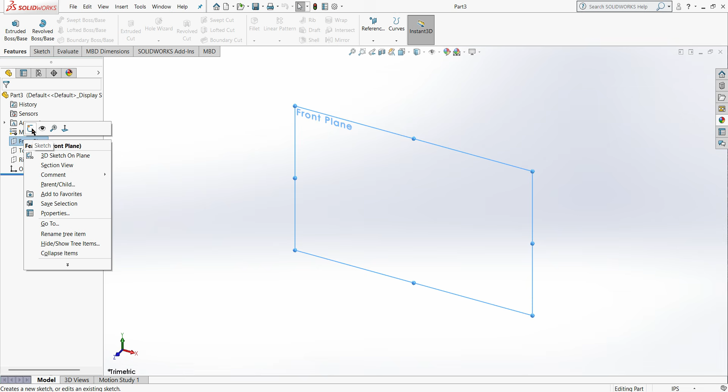Start with the front plane. Right click on the front plane, say sketch. Now take the center line and draw this 2D sketch. Before that, set the unit to mm. Double click on this line, again take the center line and draw another line.

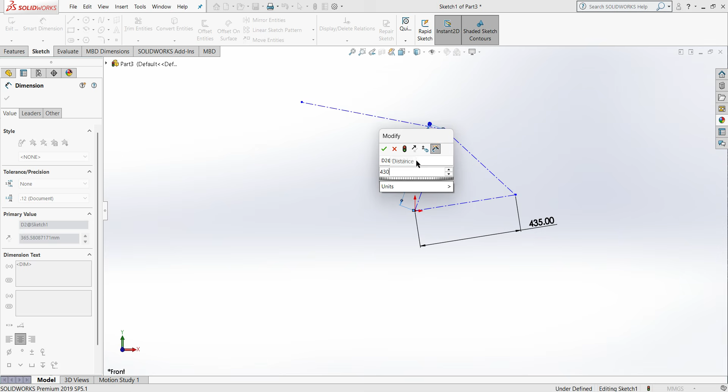Now give the dimensions to this 2D sketch. It's 435 mm. This is 430 mm. This tube length is 580 mm.

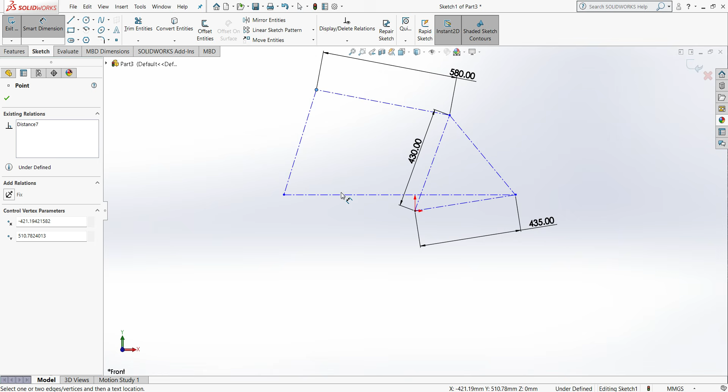Now take the center line, draw it from this side to this side. This line should be horizontal, say yes. Give the height from this to this, it's around 560.

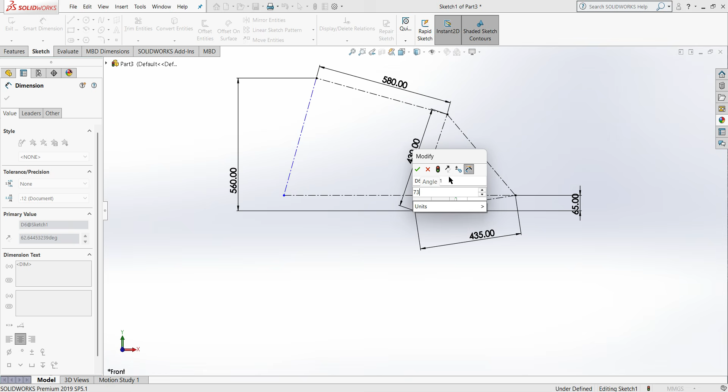Now select this point and this point and give 60 and 65 mm. Now give the angle. This angle is 73 and this angle is 75.

So our 2D sketch is completed. Now say exit. Now we have to add a plane on this point, say yes. So we add this plane to make the front fork.

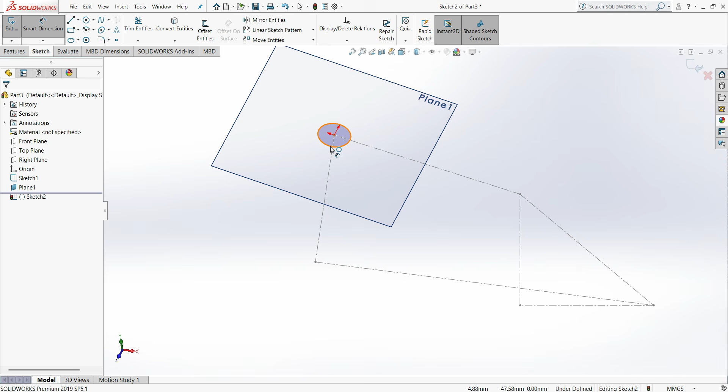Go to the circle tool, draw one circle here. Again take the circle and draw a circle here. Give the dimension to this circle, it's 52.50 mm. Go to features, say extrude base boss, and this is 130 mm.

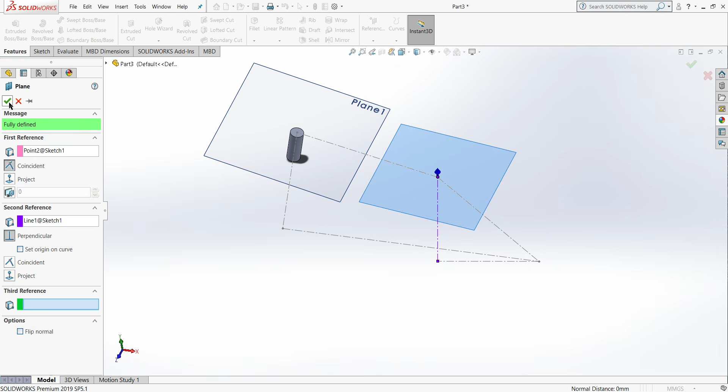Say yes. Now we are going to add another plane on this seat tube. Go to the sketch, again select the circle, draw one circle here, assign the dimensions. This is 35 mm. Go to extrude base boss, it's 50 mm.

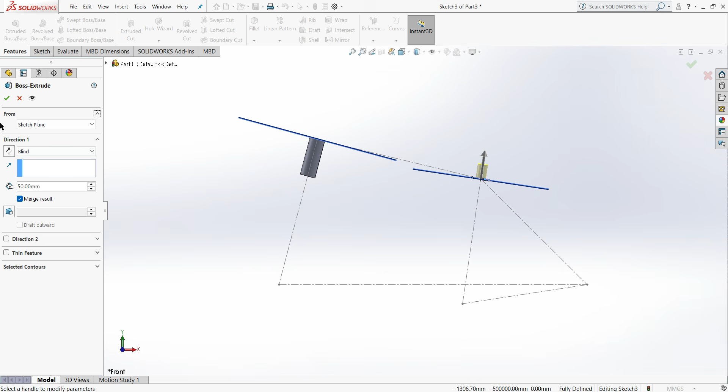So on the upper side it's 50 mm, the length of this tube. Now again add a plane, select these two lines. The plane is added. Now again draw one circle here.

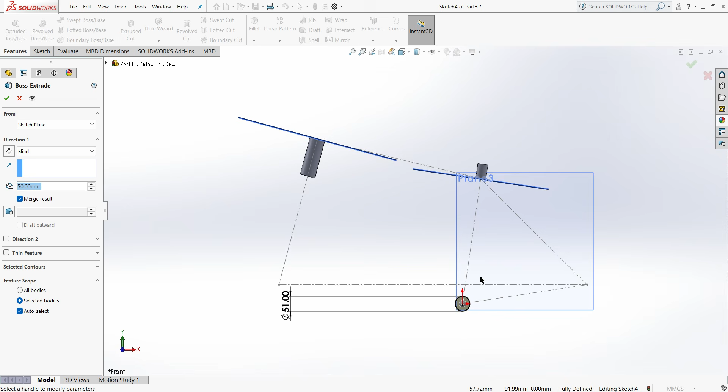Now give the dimension to the circle, it's 51 mm. Go to feature, extrude base boss, you can see. This extrude base boss is from one side, but we want both left and right direction. So select mid plane, and this length is 80 mm. Click yes. So here we can see the front fork, seat tube, and bottom bracket are ready.

Now we are going to make the seat tube. First hide the planes. Now we are going to make the seat tube. For that, select the bottom side face of this tube and say sketch, then draw a center point.

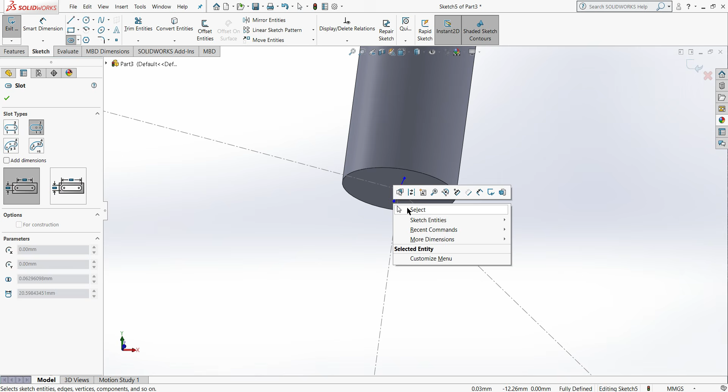Select again, draw this center point straight slot. But before that, say normal view, then it's easy to make it.

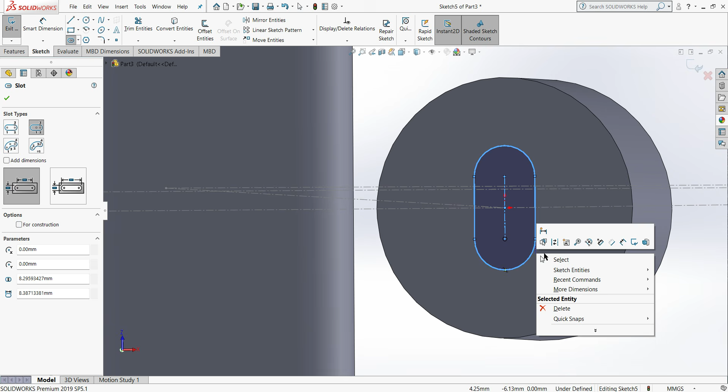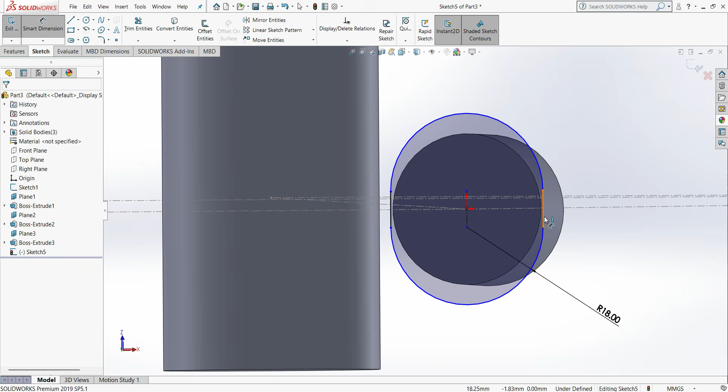Select this. Now give the dimensions. These are 20. It will be reduced up to 18, now it's looking better. Now give this 10.

Say yes. So edit this top plane, and normal view, again add one center point straight slot.

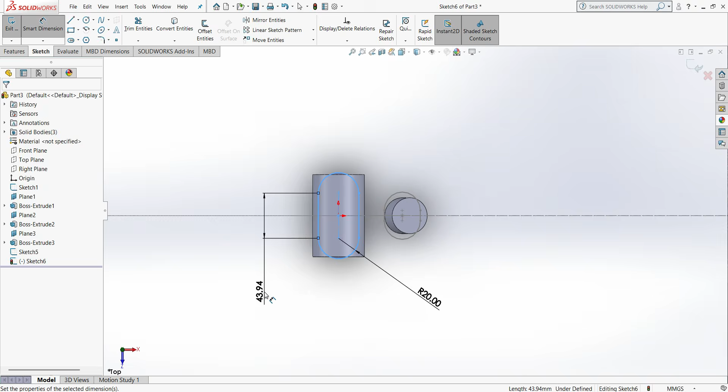Give the dimensions, it's 20, and this is 10. But okay, so this is 15. We can also increase it slightly, it's 18 now. So these both sketches are drawn.

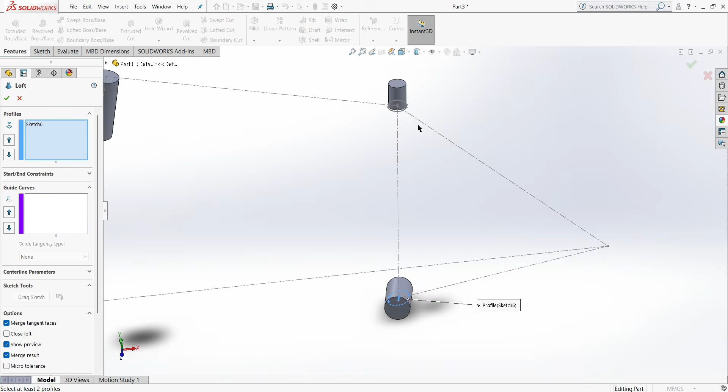Now what we have to do, go to features, say lofted base boss. Select this sketch and this sketch. This partial preview you can see here, say yes, and our seat tube is ready.

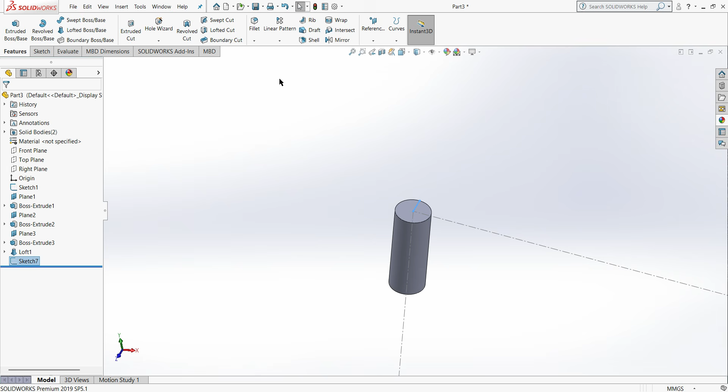Now we are going to draw the top tube. For that, go to the sketch, click on this face and say edit. Draw one line here. Say exit. Go to feature, add one reference plane.

Okay, so before that, what we have to do? Add one plane here. Select these two, say yes. Okay, increase this plane size.

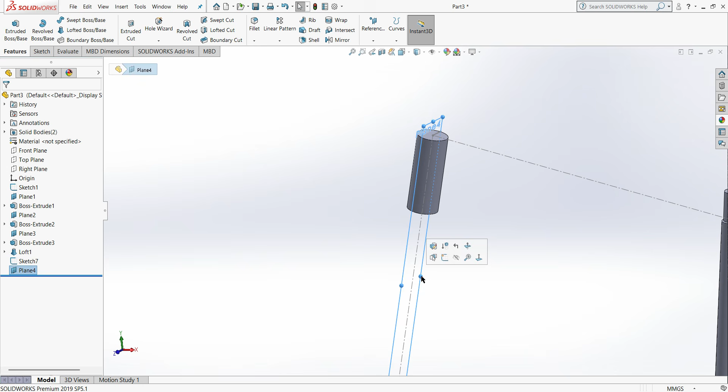Say normal. Go to sketch and again take this center point straight slot and draw one center point. Select this and say horizontal. Say yes. Give the dimensions. It's 22.50. Say yes, and this is 10.

Now it looks better. So this same sketch we have to draw here. For that, say exit. Now again select this face of this tube. Draw one line here.

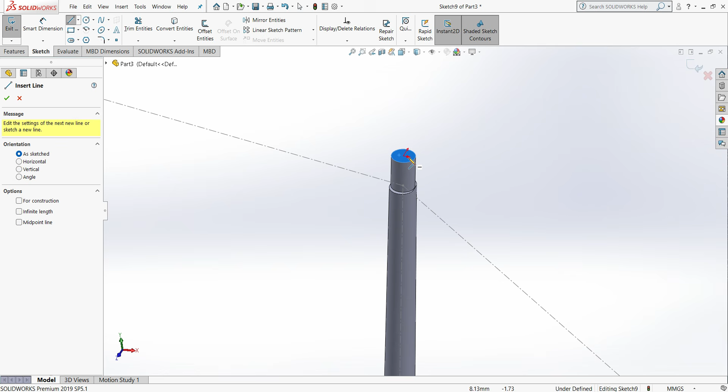Go to the features, okay first say exit. Go to the reference plane. Select one plane and this line. Again increase the size of this plane. Say normal.

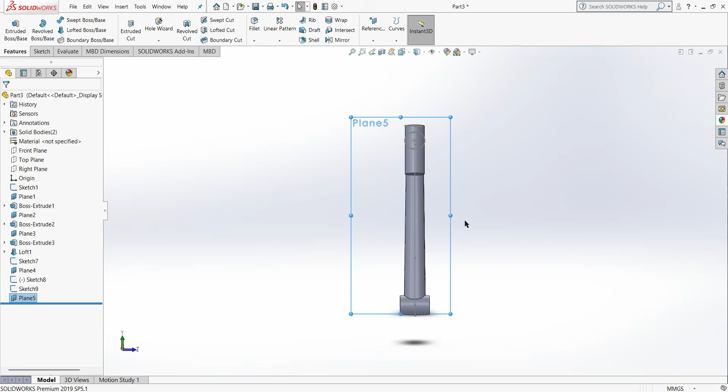Okay, so again go to sketch. Again take the center point straight slot. Draw one slot here. This should be horizontal. Give the dimensions. It's 20, and this should be 10.

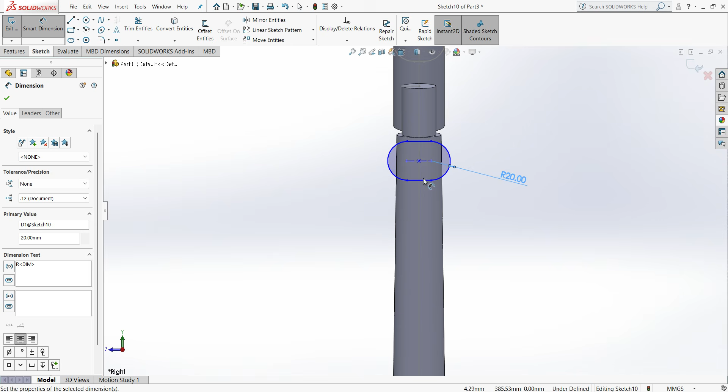Okay, so you can see it's not properly aligned with this line. So click on this point, press Ctrl and select this line and say coincide. Now it's properly aligned, and the distance from here to here is around 30. Say yes.

Now go to the features. First exit, go to the features, say lofted. Before that, what we have to do: go to the sketch, click on this plane, say yes, exit, and now click on this 3D sketch and edit.

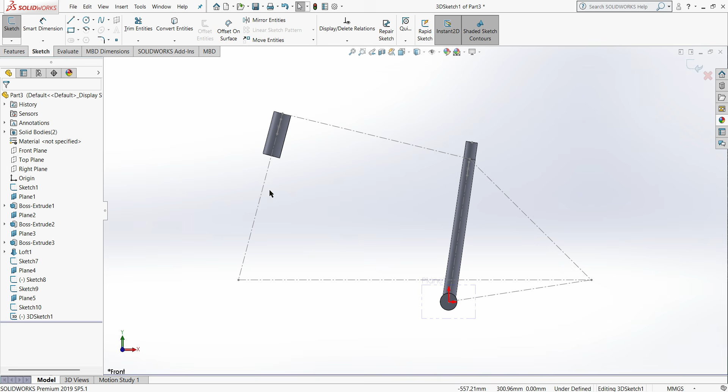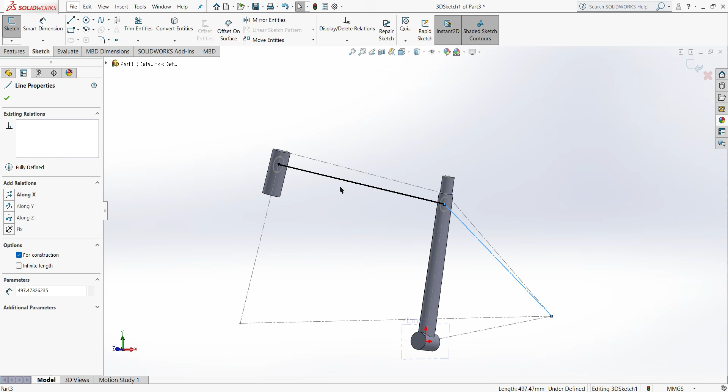Now this 2D sketch is converted into 3D. So select this line, select this center point, and this point, and again this point. It should be for the construction, this one should be for the construction, and this is solid.

Go to the feature, lofted boss base, click on this and this second sketch, and you can see the preview. It perfectly attached to this two sketch. Say yes, and our top tube is ready.

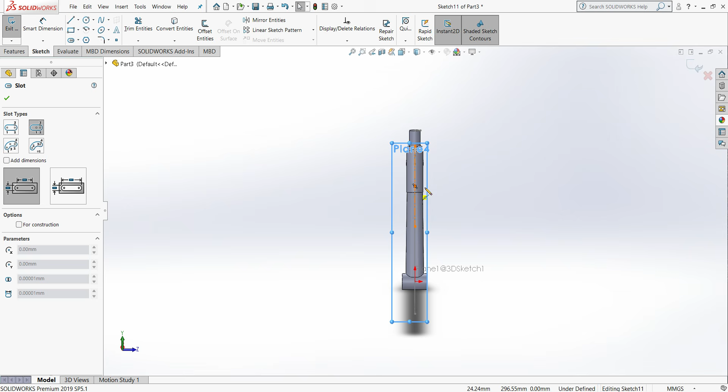So now we are going to make the down tube. For that, go to this plane 4, say edit. Okay, and normal. Go to sketch, select this center point. This should be horizontal. Give the dimensions.

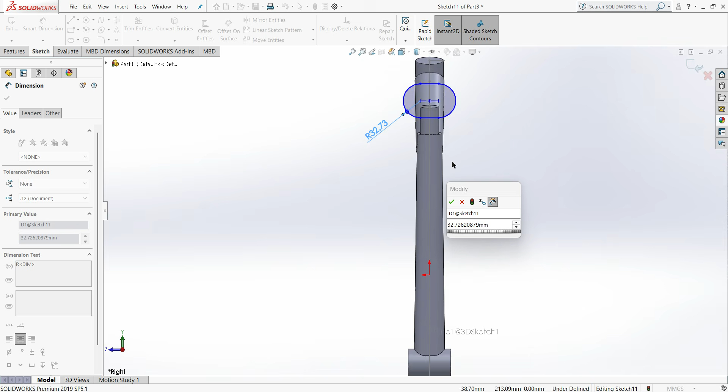Okay, just a minute guys. Say normal, okay, so now give the dimensions. It's 22.50, and this should be 10.

Say yes. And from this to this, the distance is 15, but not 10, I think it's 30. Yeah, it's 30. So you can see it's properly get aligned. Okay, so exit sketch.

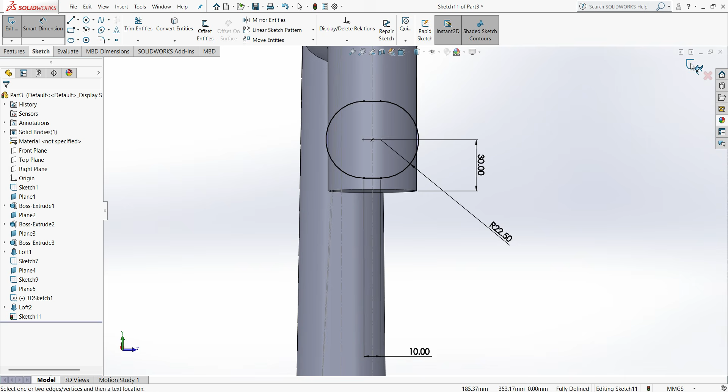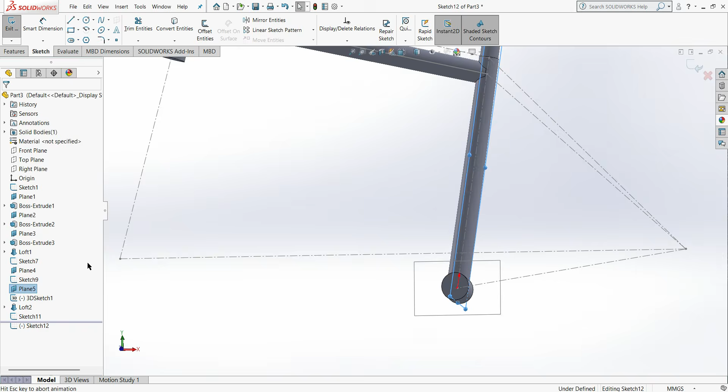So these are done. So now same thing we have to do here. Go to the plane number 5, say edit, and draw the center point straight slot. Before that say normal, and then center point straight slot.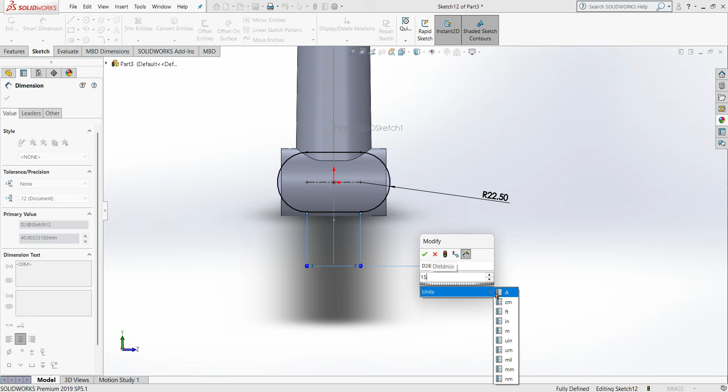Give, assign the dimensions. It's 22.50, and these are 15. Say yes. Okay, so this is done.

Now okay, so say exit. Now what we have to do, go to the sketch, click on this plane. Say simply yes, not click anything else. Say exit, and again click on this 3D sketch and say edit. So what happened now, this 2D sketch is get converted into 3D.

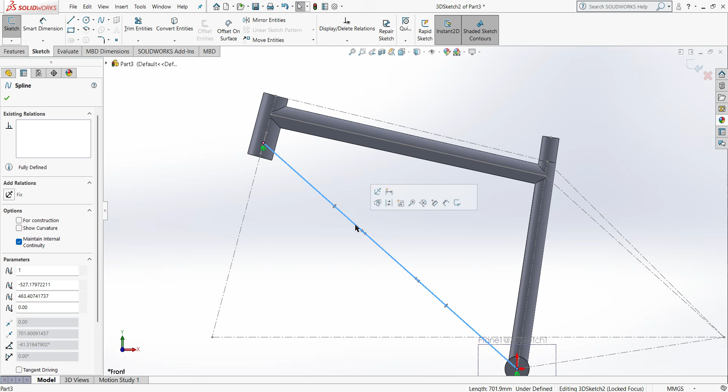So go to this, select this line. Select this center line and select this line. Now give some angle, or give some curve, not angle, give some curve to this line. Okay, so this is perfect.

So we are giving this curve because in the existing cycle also there is a curve. So it's perfectly given.

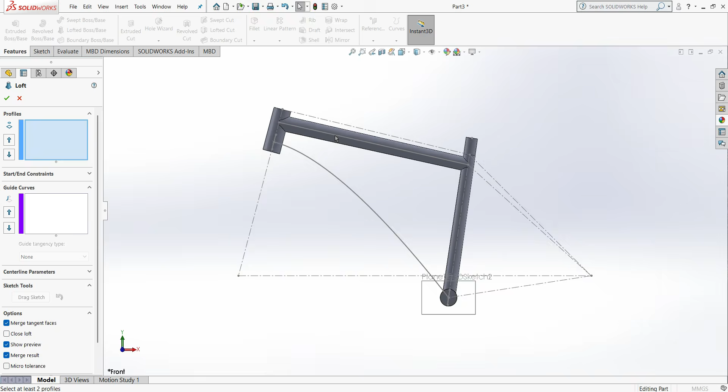So say exit, go to the feature, say lofted boss base, click on this sketch and select this another sketch, and now go to the center line, click the center line. Select the center line and say yes. It's showing some error.

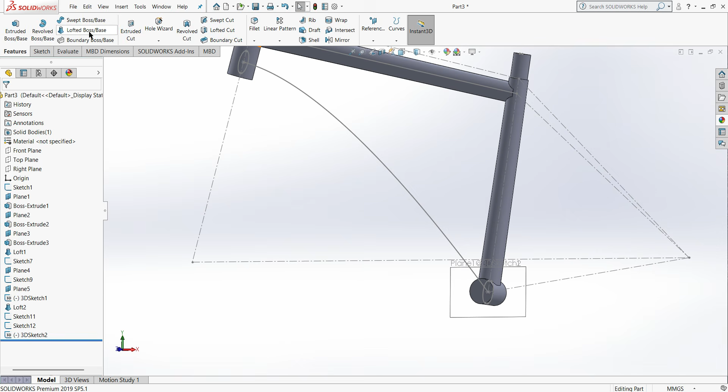We again do this. Go to the lofted base boss, click on this one, this point, and this point. Now it's visible. Go to the center line parameters, select the center line, or this curve. Now it's taken the shape of this guide curve. Say yes. So our bottom tube is ready.

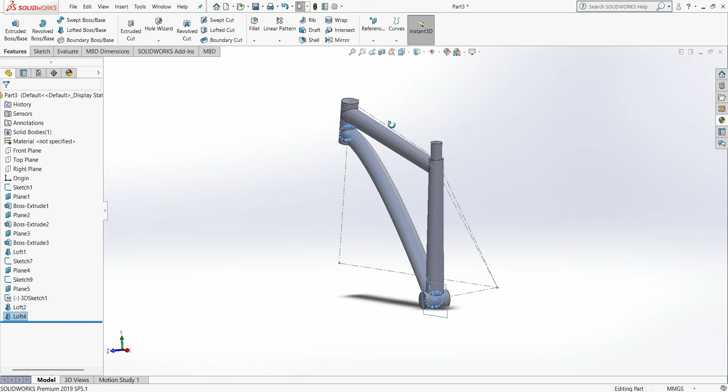So now we are going to make the seat stay. For that, click on the plane 5, say edit. Draw one line here. Before that, say normal, because due to this it's properly visible.

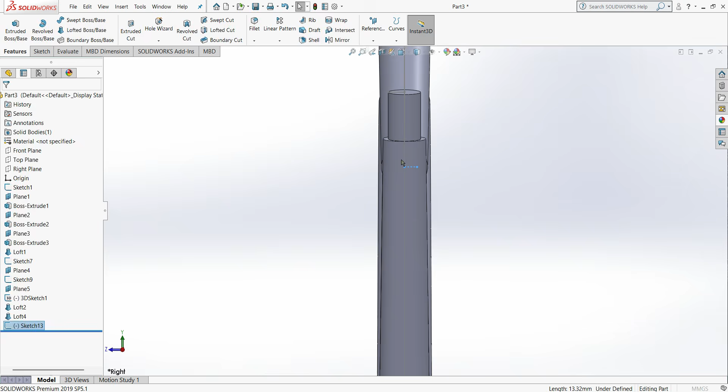So this line is drawn properly, you can see it's horizontal. Now what we have to do: exit, go to the reference plane, add one plane here, select this and this. Okay, so the plane is added. Increase the size of this plane.

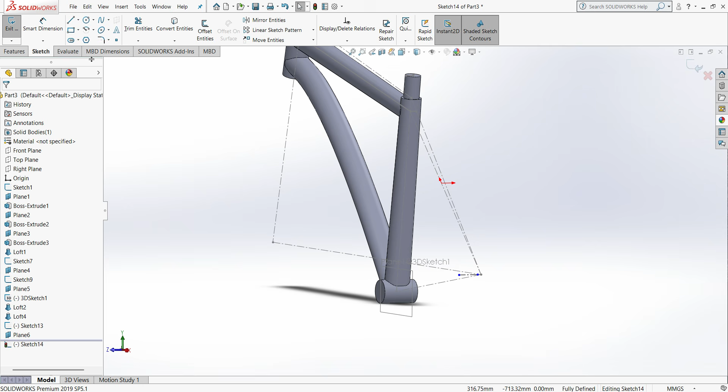Now edit this plane, go to the spline. Before that, select the center line, draw one line here. Again go to the center line, draw another line. You can see this line is not properly drawn, so delete this and draw another one. Now this line is properly vertical, both lines are vertical.

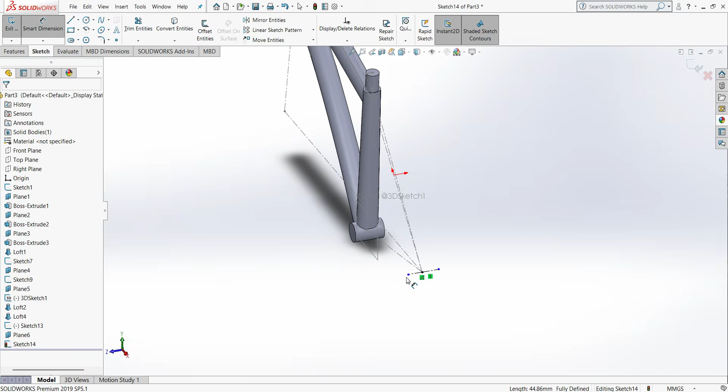Now give the dimensions to these both lines. It's 80mm and this again 80mm. Say yes.

Go to select the spline, select this point and this point, say yes. Now click on this line, you see this one, say this horizontal, click yes. And this one should be vertical.

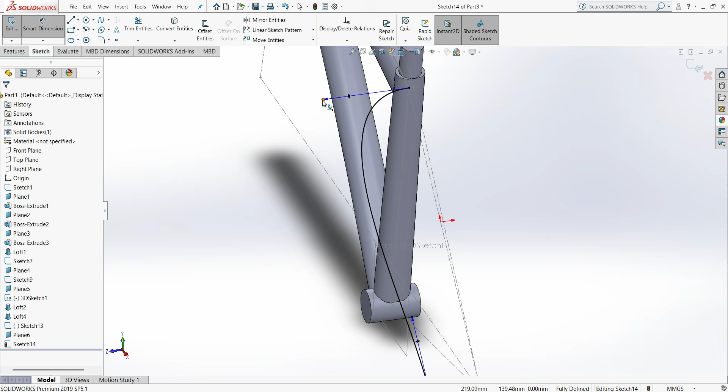Say yes. Click on the dimensions, say it's 164.46. And this should be 1160. Say yes. Okay, so it's drawn properly.

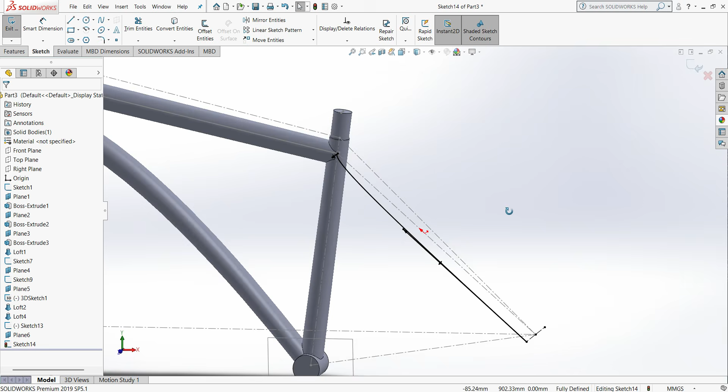So now what we have to do, we have to draw an ellipse here. Say exit, go to reference plane, add one plane here, select this one. So the plane is added.

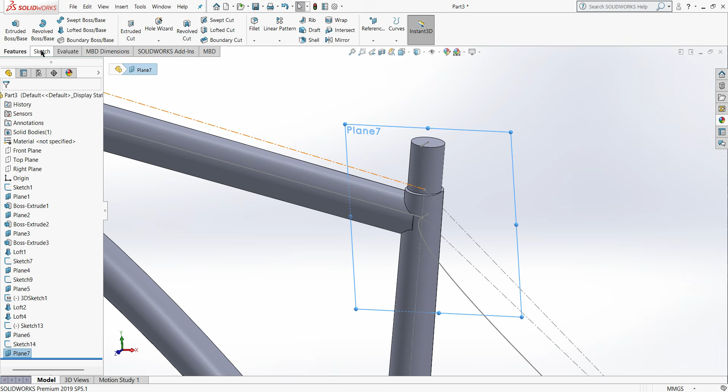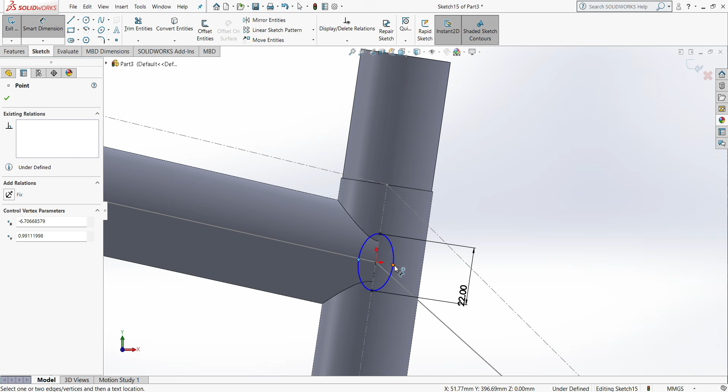Go to the sketch, select the ellipse, draw one ellipse here. This ellipse should be properly vertical. Assign the dimensions from this to this, it's 22, okay say yes, and this distance should be 15.

So we have to increase this distance to 25. Now it's looking better, or we can decrease this one to 10, but it's very less. So set 12, and this should be 22. Now it's looking better.

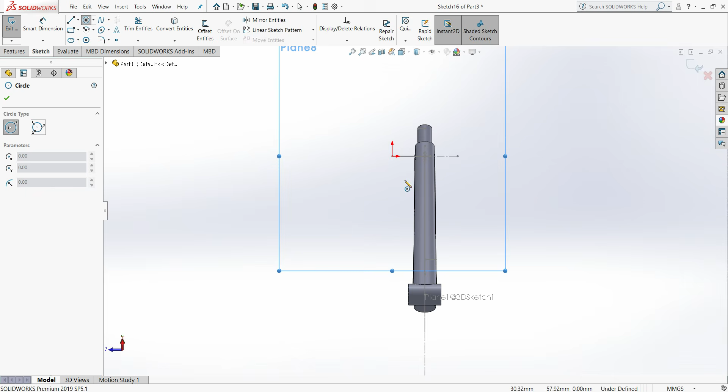Now go to the feature, go to the reference plane, select plane, and select this point and this point, so another plane is drawn. Say normal. Go to the sketch, draw one circle here, give the dimensions to this circle. It's 20. Go to the feature, say exit.

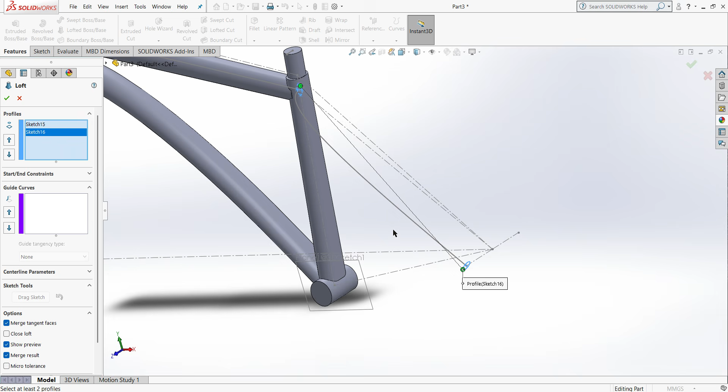You can see this one and this one is ready. Go to the Lofted Boss/Base, select this one and this one. I think it's not properly selected, we have to do it again, select this plane and this one. So this partial preview is shown here. Go to the center line, select this center line, then it will take the shape of the center line. Say yes. So this right hand side is done.

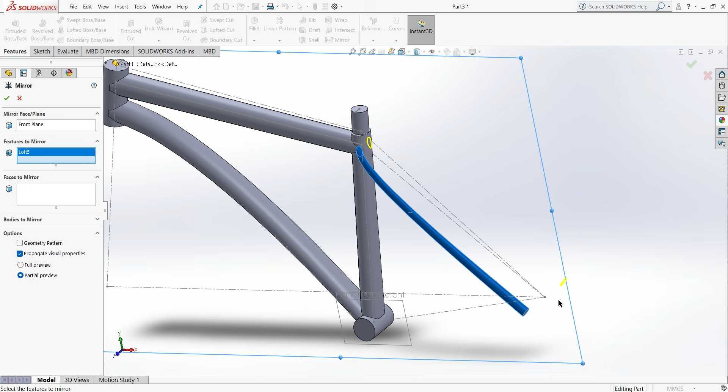Now select the front plane and go to the mirror. Select the front plane and go to the mirror, then select this one. You can see this yellow mark shows the right hand side. The right hand side change, say yes. So both sides of the seat stay are done.

So now we are going to make this chain stay. For that, go to this plane, go to this plane 5. Draw one line here, it's only to add the plane.

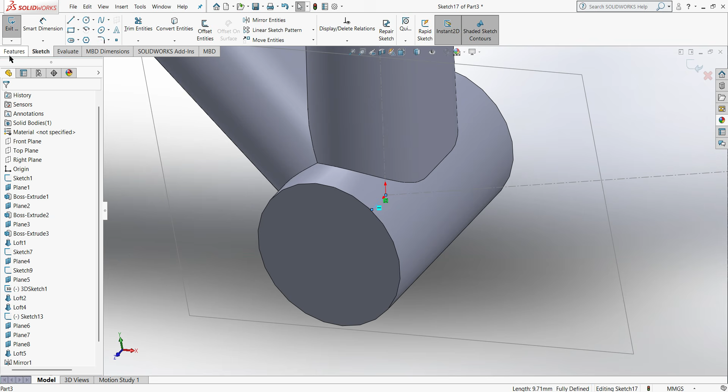This line is not drawn properly, so we are going to draw one construction line instead. This line is properly horizontal, you can see. Now say exit and add one plane. Select this line and select this line.

Again we have to select, go to the plane, select this line and select this line. Say yes. Increase the size of this plane. Say normal.

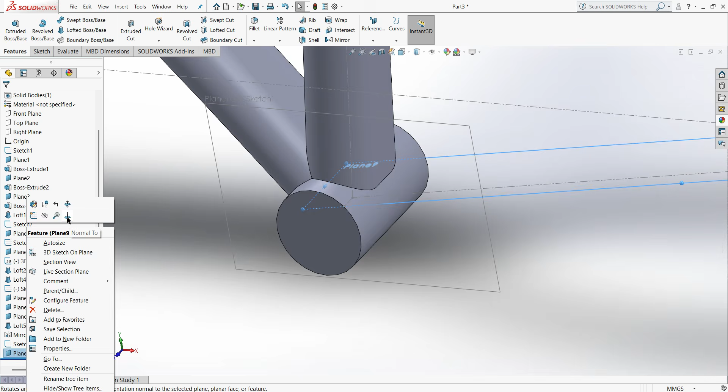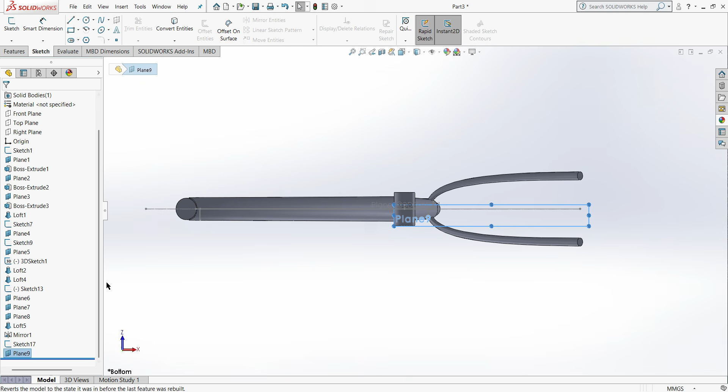So what we have to do now, go to the sketch, select this spline, select this point. This line is not shown, so we have to draw lines here again. Go to the center line, draw this line, so it's properly vertical.

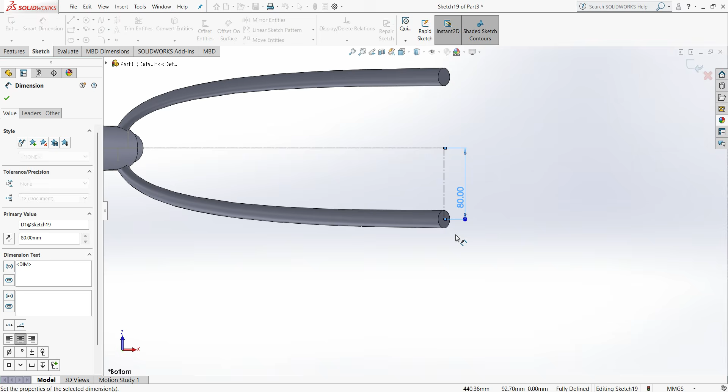Give the dimensions, it's 80mm. Now it's perfect.

Now go to select the spline, select this one and this one. Say this one horizontal, say yes, and simply give some angle. Now this looks better.

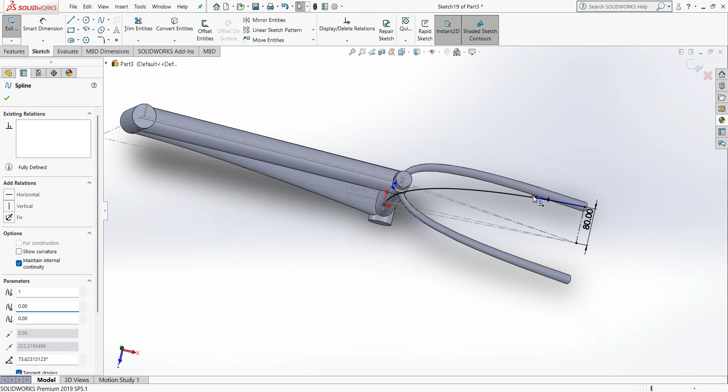You can see this side is ready, but we have to reduce it a little bit. Normal. Okay, so it's perfect. Now add one plane here.

Go to the feature, first say exit, reference plane. Select this, say yes, go to the sketch, draw one ellipse.

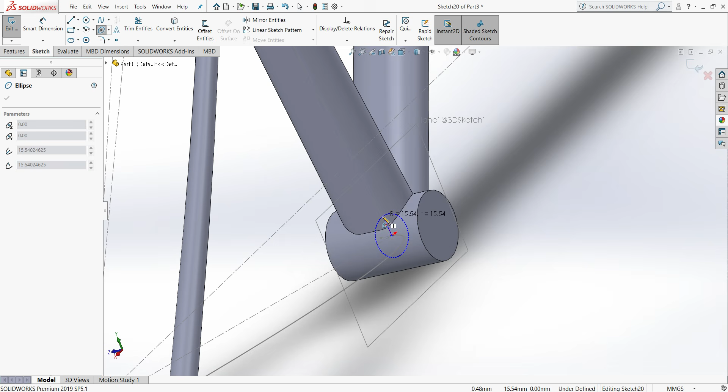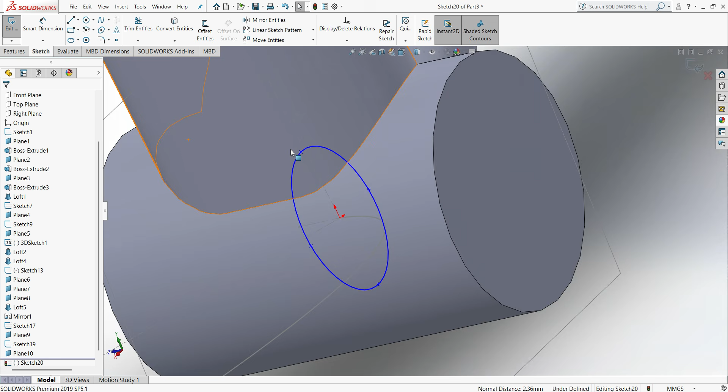So this point and press Ctrl, and this point should coincide, so it's properly vertical now. Delete this point. So this point and this line are coincide. Okay, you can see these are coincide with each other.

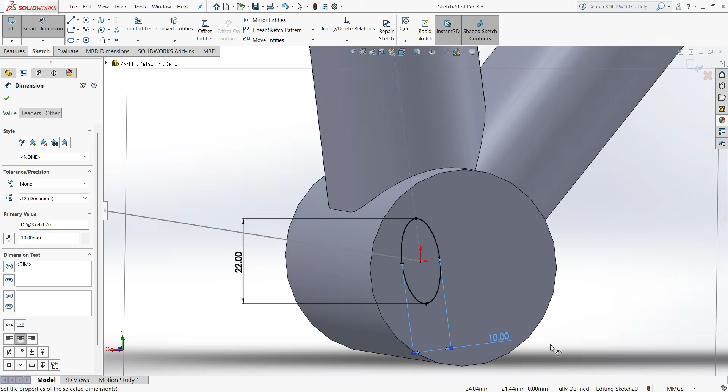Now give the dimensions, select this point and this point. It's 22. And the distance between this and this is, not 15, it's 10, but it's very small. Okay, but it's looking better, or we can give it 12. Okay, say exit.

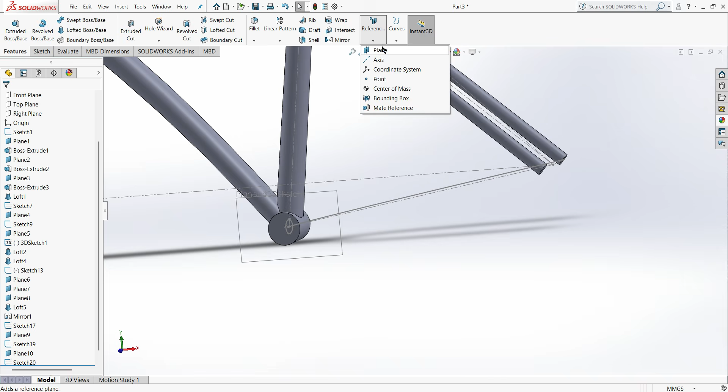So now add one more reference plane. For that, select this one and this line. Okay, so the plane is added perfectly.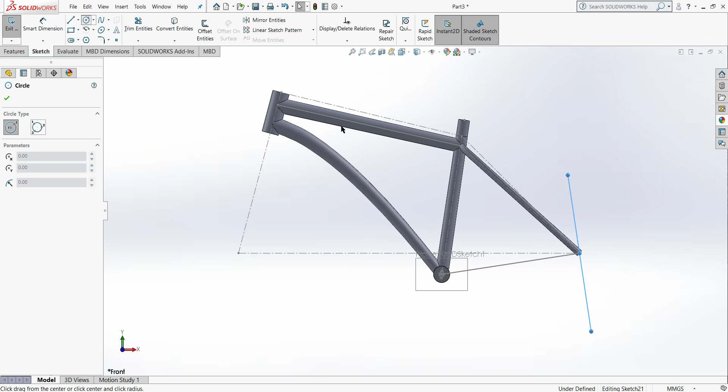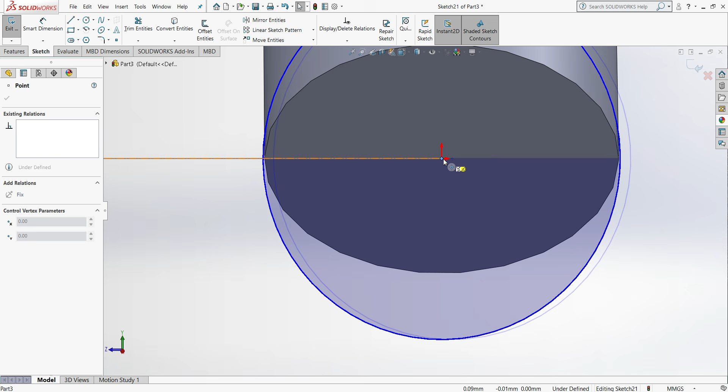So now go to the sketch, select the circle, draw one circle here. Okay, so you can see the circle is drawn perfectly. Say normal. Okay, so this circle is not fixed. Okay, so now this circle is fixed.

Okay, so give the dimensions. It's a 20 mm circle. Say yes. Say exit.

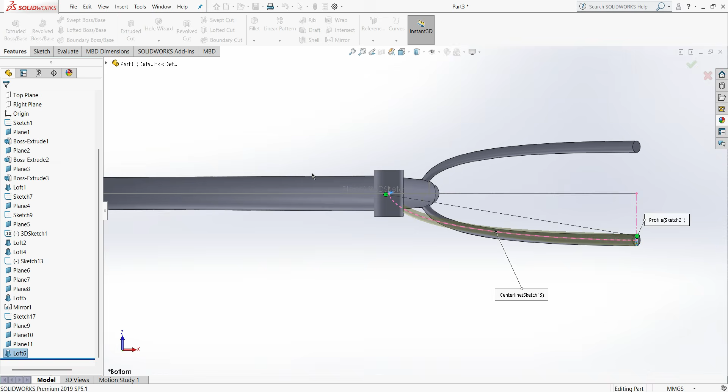Okay, so now go to the feature, click on lofted boss base. Select this sketch and this sketch, and select... just a minute. Okay, so click on the center line and select this line and say yes. So this chain stay is properly fixed.

Okay, so now this side is remaining. So go to the front plane and then go to the mirror, select this one, and say yes. Okay, so both sides of the chain stay are ready. So add another one.

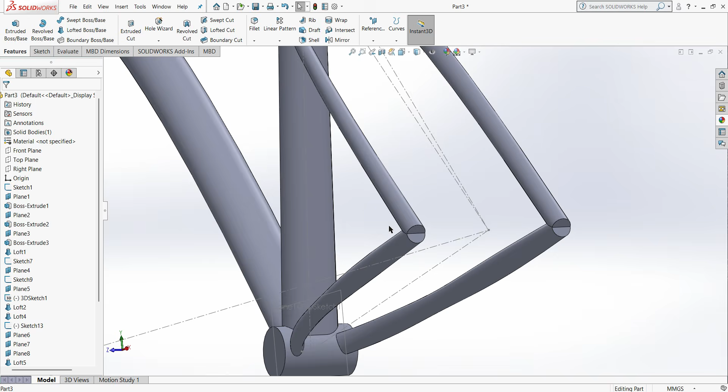Okay, so now we are going to make the rear dropout. For that, click on this plane. Say edit sketch, click on line and draw the line here, from this to this line are drawn, because we have to add the plane.

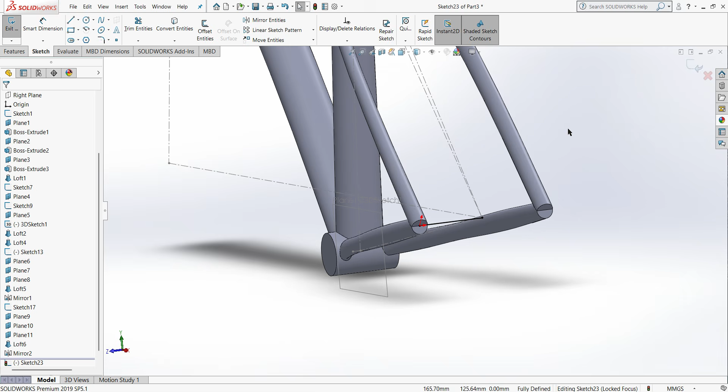So go to the feature, go to the reference plane, add one plane, click on this point and also this line. So our plane is added. Now go to the sketch, select the circle. Okay, so now draw one circle and give the dimensions to this circle.

It's 20 mm. Go to the feature, extrude base boss. Okay, it's only on one side. Click on the mid plane because now it's on both sides. Say 22 mm. Yeah, now it looks better. Okay, so this side is drawn.

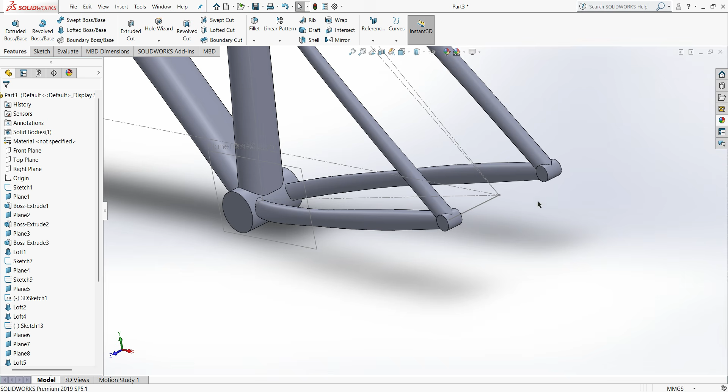So now go to the front plane again, go to the mirror, select this one and this, and say yes. Okay, so both sides are ready. Okay, so now our bicycle frame is almost ready.

If you want to give the fillet, you can give the fillet. Okay, it looks better if you give the fillet to the bicycle frame.

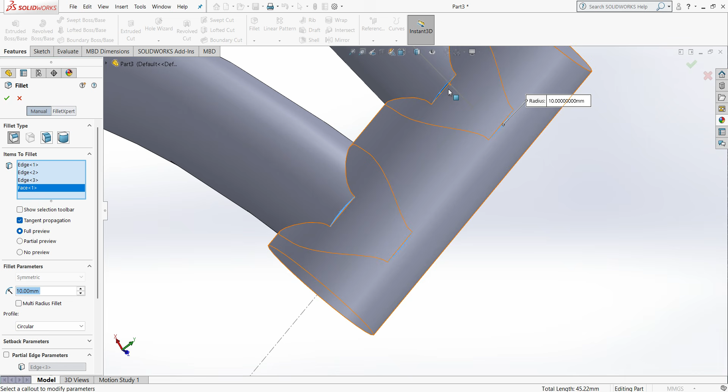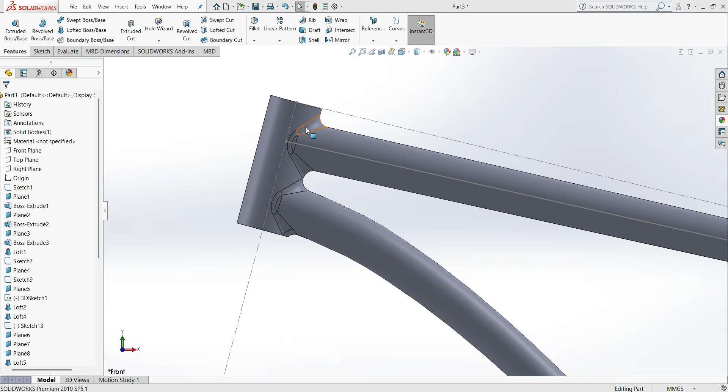Okay, so you can see the fillet is given here. So accordingly you can give the fillet to the other components or other parts of this frame. Okay, so now you can see we've given the fillet to the front fork, at the chainstay near these joints, and at the bottom bracket and rear dropout.

So now the last step and most important step is shell. Okay, so go to the shell, click select all the faces of the cylinders. Okay, this one, this one.

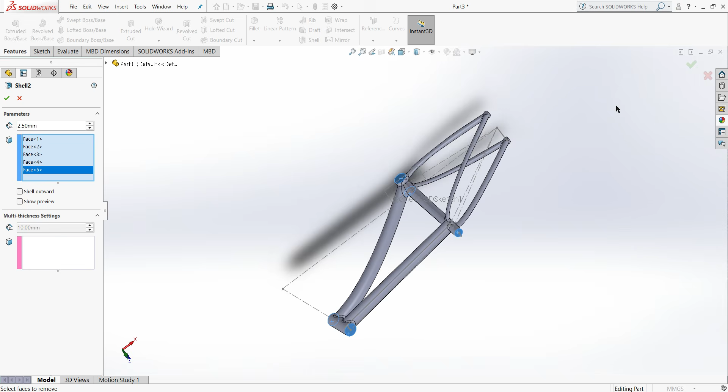At the rear dropout also select all the faces to give the shell. Okay, so all the faces are selected. Now the thickness is 2.5. Okay, and say yes. It will take time to apply the shell.

Okay, so the shell is applied. Okay, so you can see the shell is properly applied here, also at the seat tube, at the bottom bracket, and at the rear dropout.

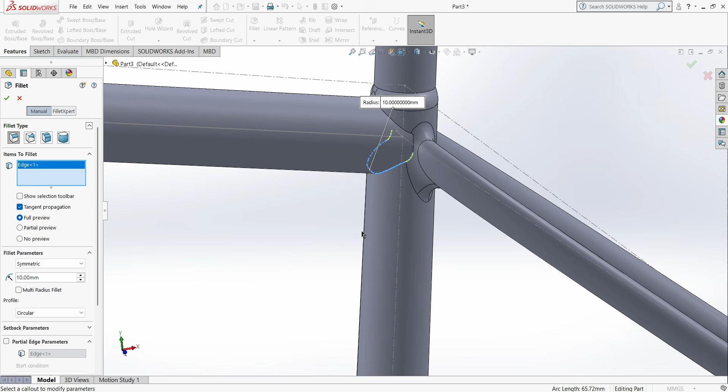Okay, so you can also give this fillet here, it's remaining. Okay, so you can increase it. Okay, so give 10. Okay, it looks better now. Okay, so after giving the fillet, our bicycle frame is ready.

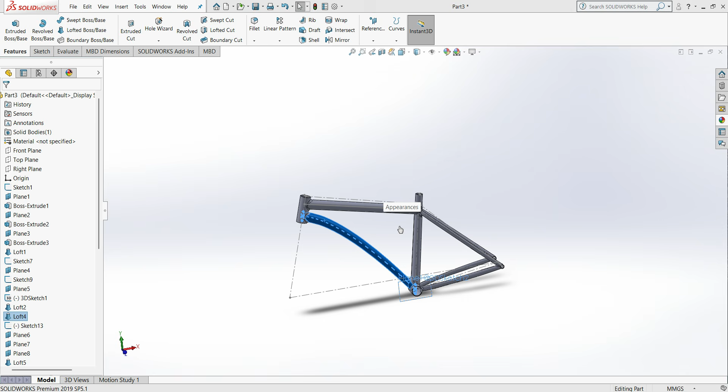Okay, so you can give the color to this frame. Right click on this bicycle frame surface and select the body type, and at the appearance there are so many colors, give whatever you wanted. Okay, so our bicycle frame is ready.

Okay, so we made the bicycle frame here. It's ready. This is the look of the bicycle frame, the final view after applying the color.